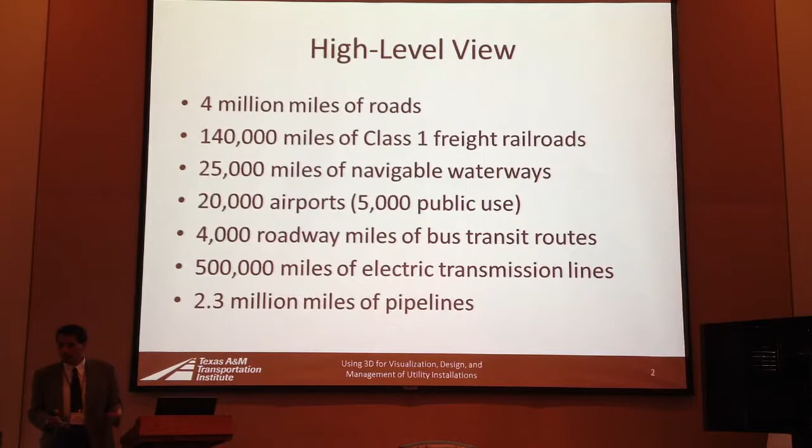Everybody knows there are approximately 4 million miles of roads in the U.S. Perhaps Google knows much better than anybody else how many miles of roads we have. Freight railroads, 140,000; 25,000 miles of navigable water. I didn't know that there were 20,000 airports in the U.S., of which 5,000 are public use, so I looked it up. 500,000 miles of electric transmission lines and 2.3 million miles of pipelines. This is what people normally consider part of the transportation system, the big stuff. But here's a reality check.

Let's look at underground facilities for a second. Tunnels and structure foundations, right? That's one. ITS and other agency-owned infrastructure. 1 million miles of water pipes, 600,000 miles of sanitary sewer. And look at this one: 19 million miles of fiber optic cable added each year. I didn't believe it when I first read it, but I looked it up, and yes, it's between 5 and 10, 15 million miles. Now, not all of that goes underground, but it's a significant amount. Jim is going to mention another statistic: 35 million miles of utilities, right?

Underground, that we know about. Exactly. But notice that if this number is true, and I still don't know if it is true, you probably need to revise that number every year, right? Well, and with fracking operations, we're getting an additional 50,000 miles of underground pipeline just in Pennsylvania alone. Right. So each year. And of course, all the electric and telephone distribution lines, and I figure that those must be included in the 35 million number that we have.

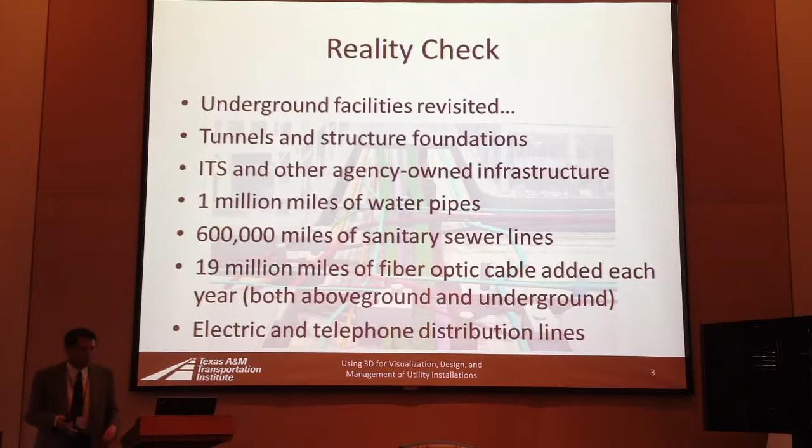Now, I will be very brief on the next couple of slides because Jim is going to mention big data. These keywords come from a definition that IBM has put together, talking about volume, variety, veracity. Volume, I just mentioned those big numbers. Variety: for underground installations, particularly utilities, we have a wide range of spatial data models and databases. That's a reality we have to deal with. Also, not just spatial data, but also non-spatial data. But most assets are depicted using 1D, in many cases linear referencing, or 2D, but very little is done in a 3D environment.

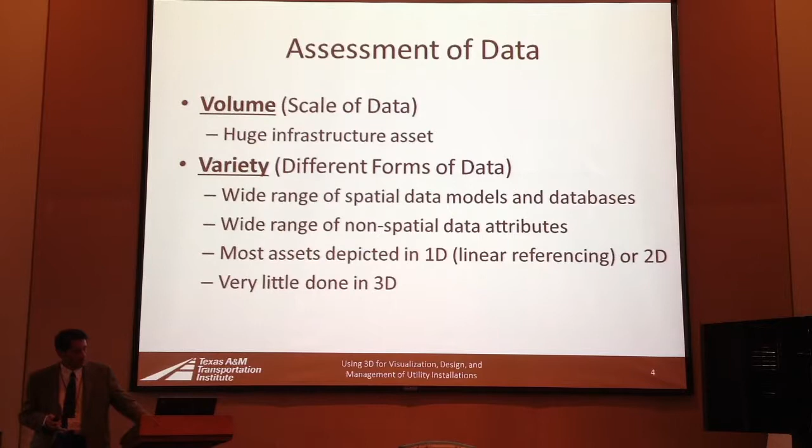In terms of velocity, we are increasingly using all these great technologies, Google Maps, Google Earth, LIDAR, and all that. But remember, garbage in, garbage out is the issue of veracity, which also has to do with big data. One of the key issues in the case of utilities is what are the impacts of not having accurate information. And remember the top 3 reasons for project delays and cost overruns? Utilities are mentioned there because of that. Okay.

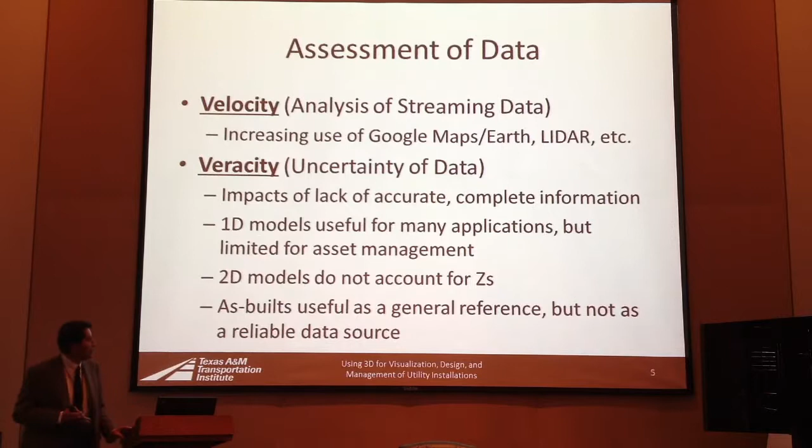Of course, 1D models are useful for many applications, but not necessarily for asset management. And in most projects, the 2D models that we normally use for utilities don't account for Zs. As-builts are useful as a general reference, but not as a reliable data source. So, if we're going to transition to big data for utility installations, there are a number of things we need to do as a community. Develop spatial data standards, and I think Jim mentioned that this morning briefly. He mentioned the ASCE standard. Developing standards for non-spatial data as well.

But at the end of the day, what we need to do is make sure that we have good records after projects are built, and how do we do that, right? A lot of people argue that the best way to capture information about utilities is when the trench is still open, when the utilities are being installed. That's the best time to capture that information. So there is a big need for 3D utility information. I think I'm making that case.

I mentioned the survey; one of several surveys, this one in 2002, highlighted that utility location was the most frequent reason for delays. Spring forward a few years, there was a joint committee that provided recommendations to FHWA on ways to accelerate highway construction. There was a letter, coming from the construction industry. Contractors were telling FHWA that one of the sources of inefficiency was utilities that had not been relocated, or were relocated and they didn't know where they were, etc. And so they highlighted a number of things that had to happen.

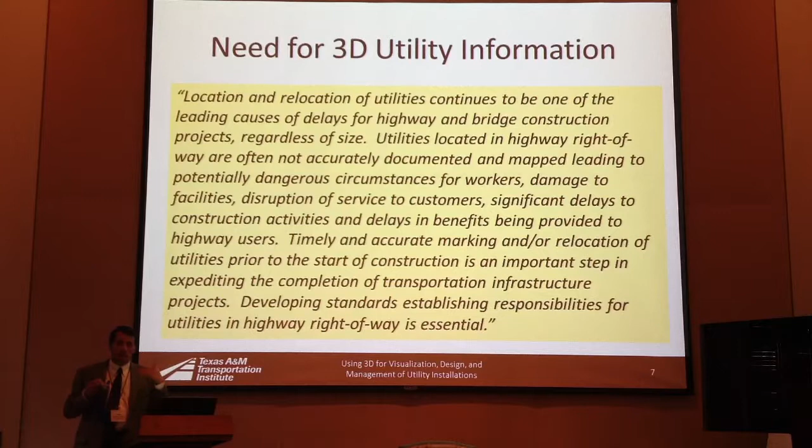They said timely and accurate marking and/or relocation of utilities prior to the start of construction is an important step. They also mentioned developing standards. So those are key requirements that the construction industry has identified. There's been some research in recent years; I'll mention a couple. From the SHRP2 program, we have R01A, which was supposed to develop a 3D framework for the inventory and management of utilities. Also B and C, which have to do with the identification and location of deep utilities and other methodologies. I'm not going to touch on that.

There was another series, the R15 series B and C, which developed a utility conflict matrix approach and process to manage utilities. 15C is active; we are actually working on it, conducting trial implementation. There's also been some research at the state level. Texas completed a couple of research and implementation projects. Florida DOT also completed one on the feasibility of using CAD information to develop GIS-based inventories of utilities, but nothing on 3D.

The last bullet is really the subject of my presentation, a project funded by FHWA looking at the feasibility of 3D mapping and marking of underground utilities. So what was the purpose of this project? In looking at the SHRP2 R01A project, there were several issues with the research. I'm not going to get into that. They put together this scope of work that basically asked for an answer to the following questions.

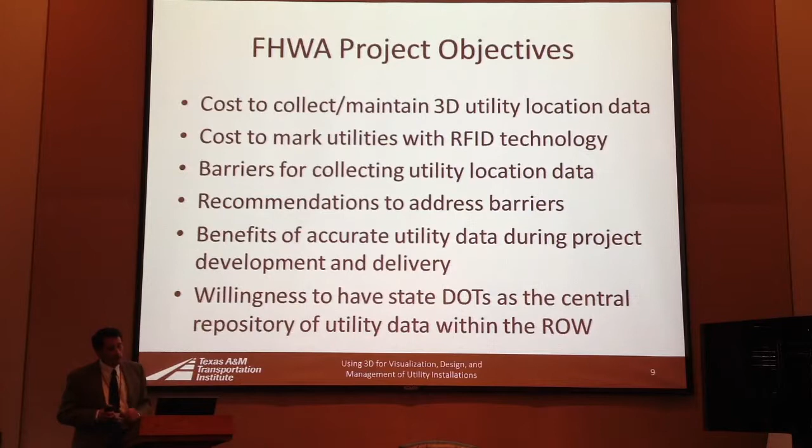And finally, this one, which is a tough one to answer, is willingness to have state DOTs as the central repository of utility information for the right of way. So there are some examples. This one is from Seattle. As I recall, Jim, correct me here if I'm wrong. This was really for visualization purposes, right? Correct. This was really not the result of a 3D investigation, or maybe 2D.

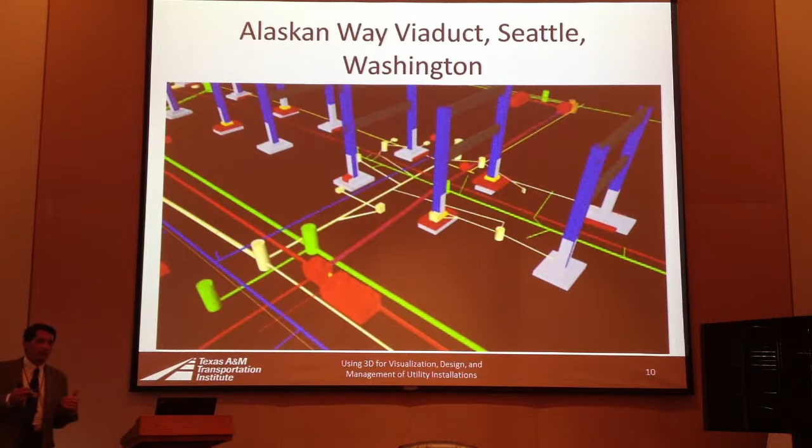Well, we did 2D investigation very thoroughly, and a few thousand spot locations for the Z data, but everything in between those spot locations was a best guess. Okay, and this is the result of that. So remember, garbage in, garbage out. Unless you characterize the uncertainty associated with those utilities, that's something to do with visualization. This is a pretty picture, but there is data behind it. And if you use this product as part of the workflow for design, you have to understand those uncertainties.

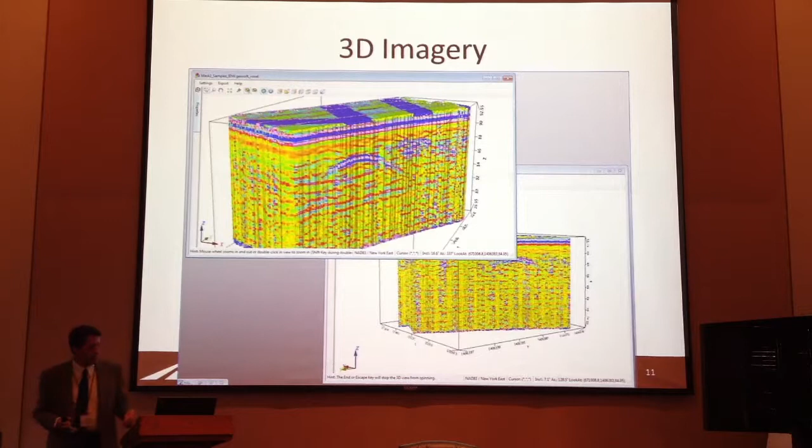This is the result of a tool, which is GPR in this case, using a GPR array that enables the characterization, actually the identification of certain spots where there might be utilities. Let me put it this way. It requires a lot of interpretation. You see some of these elements right here, which kind of point to the probability of utility installations that might be there. It requires a lot of interpretation.

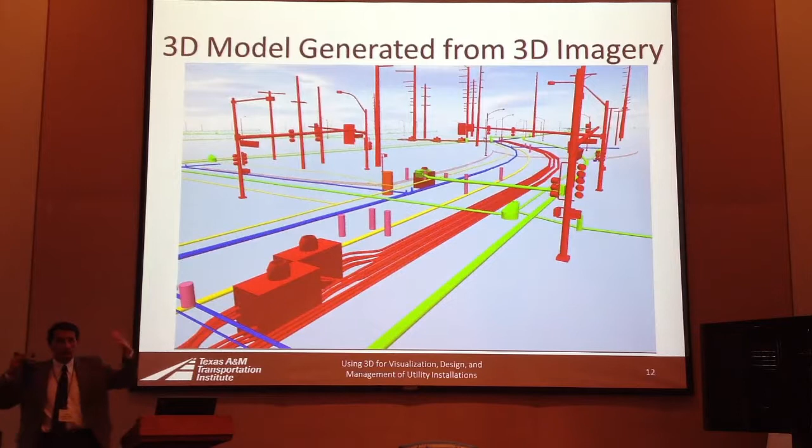And then this is the next phase. You conduct a very serious, thorough utility investigation using a variety of tools, and depending on the workflow, then you develop these 3D tools. In this case, it's not just visualization. This one was really the result of converting all that set of data points, and the result is this. Here's another one. This is in Ireland, by the way.

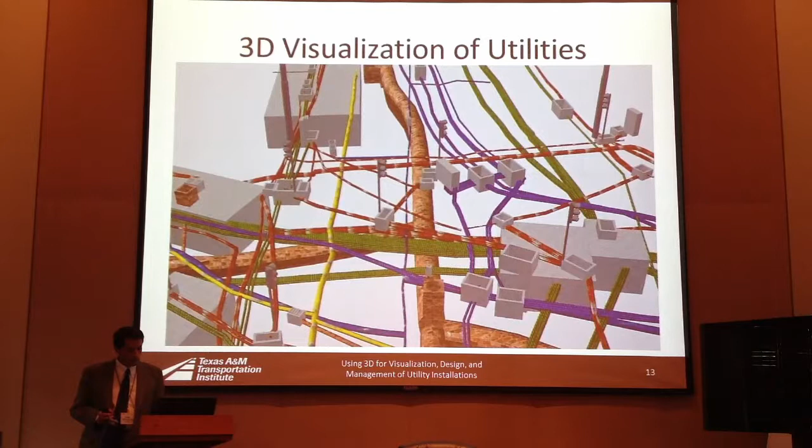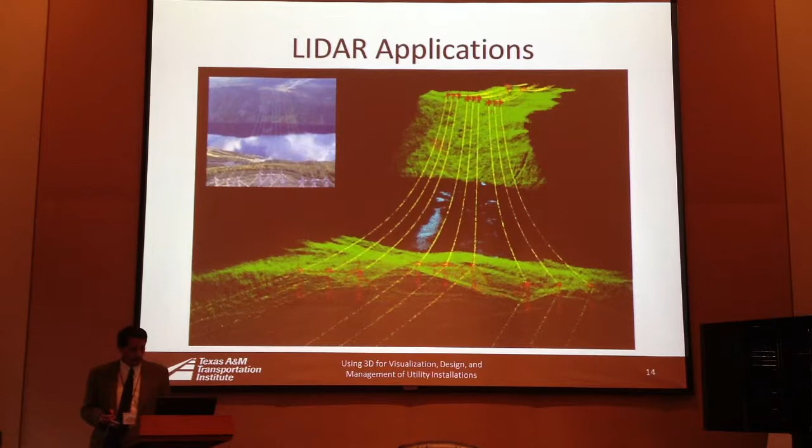LIDAR, I shouldn't forget this. Of course, you can't use LIDAR for underground, but there have been some applications trying to use this to characterize above ground installations. So, in terms of what we need to do for this project, we are halfway through it. We submitted a first report almost a year ago, and we are actually right now working on task C. And I will talk about that in a second. It basically involves talking to a number of state DOTs to gather information about what they're doing.

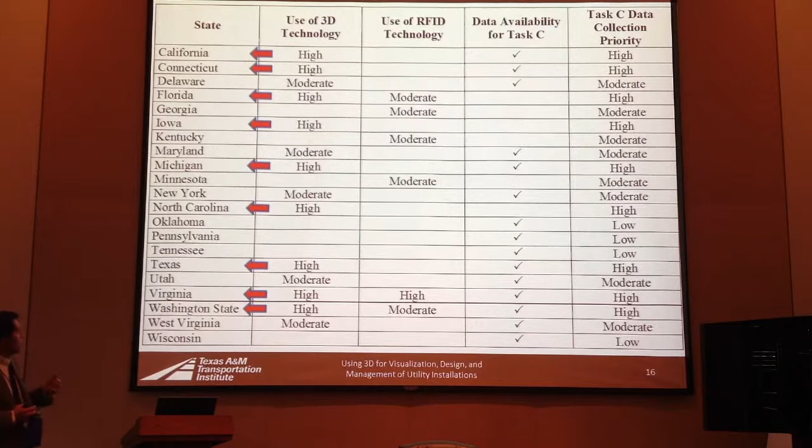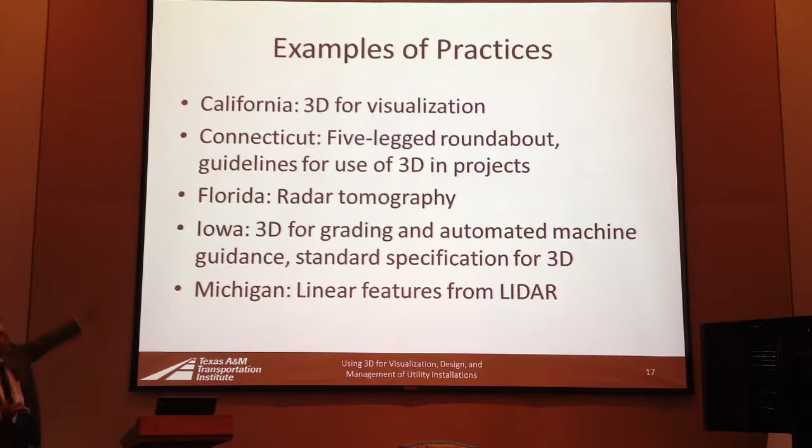Last year we surveyed all 50 states, and most of them responded. And the ones that you see marked with an arrow provided answers that, in our opinion, were interesting. For example, in the case of California, we learned that they were using 3D for visualization mainly, but nothing utility. You rarely see anything related to utility, but we're trying to capture practices from what we call traditional 3D, if we can say that. But the idea was to try to learn some lessons from that, and then try to project it to the case of building 3D models for utilities.

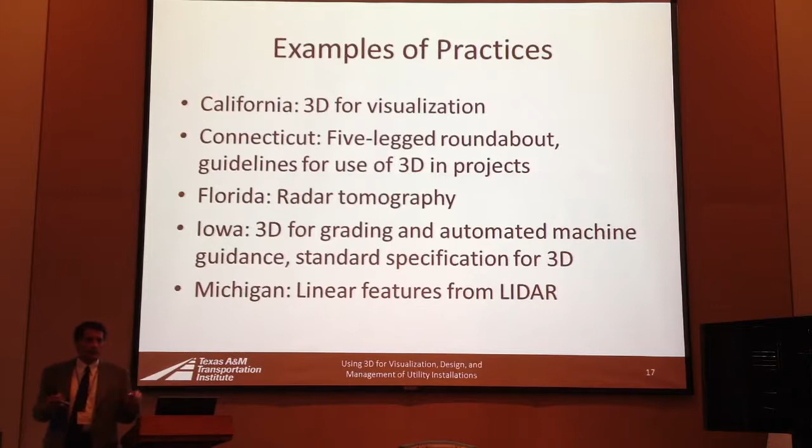In the case of Connecticut, we learned they have developed guidelines for the use of 3D in projects. In Florida, there is an active project right now dealing with the use of radar tomography, and I'll touch base on that for a second. In Iowa, everybody was talking about Iowa and the fact that they were at the forefront of using 3D for automated machine guidance. And so we actually traveled to Iowa to learn what the practice was about and learn some lessons from that. In case of Michigan, we learned that they are using LIDAR, and more importantly, they are extracting linear features from the LIDAR product.

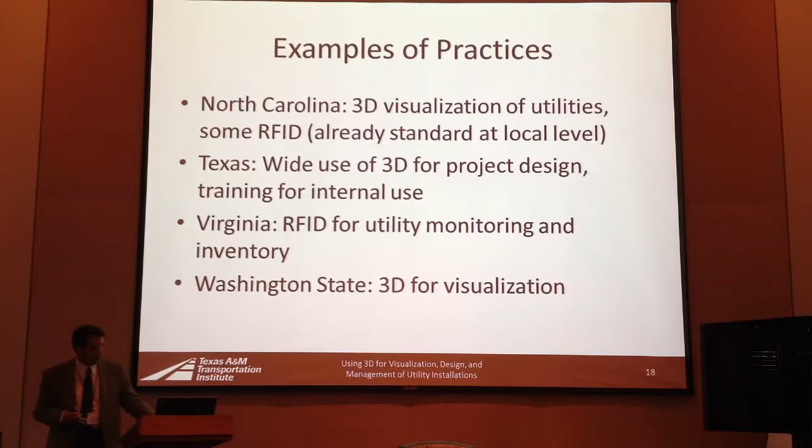In the case of North Carolina, they're beginning to use 3D a little bit to visualize utilities, but mainly for public outreach applications, not design. Some RFID already standard at the local level. We know from Texas, wide use of 3D for project design. We still need to interview them to actually learn the extent to which they're using it. And then in Virginia is the use of RFID for utility monitoring and inventory, and I'll touch base on that as well. In Washington State, there's also 3D for visualization. You already saw the examples here.

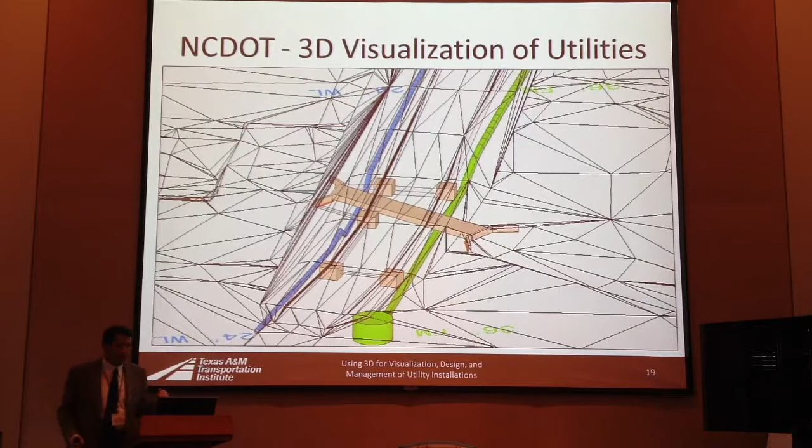North Carolina, this is an application that they shared with us. Of course, traditional 3D characterization of the project. You notice here a drainage structure, and then here the facilities, the utilities. In this case, what they did was to take the plan view and cross-section and profile information to develop this 3D characterization of the utility information. That's all they used it for. And that seems to be kind of the typical application.

automated machine guidance. And so in the mid-2000s, Iowa said, okay, what can we do to help you, the contractors, develop a better workflow? And this is what the contractors say. You know, this is what I would like to get from the Iowa DOT, is something that would enable us to develop a 3D model faster. And they decided, okay, yeah, we can do it. And so Iowa basically has switched its own workflow, and they do 3D design from scratch, from the very beginning.

In our conversations with them last month, we also learned that they have begun to use 3D for preliminary engineering design, which is fantastic. So they are moving in this direction. We also asked the question, how much does it cost to develop 3D models? And guess what? Their answer was, we don't know. The reason is very simple, because 3D is now an integral part of their workflow, and so for them it's really not an issue, right? And that was an interesting observation.

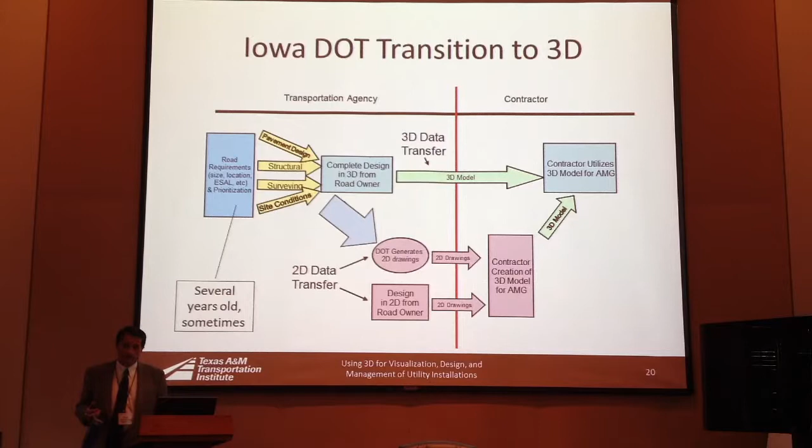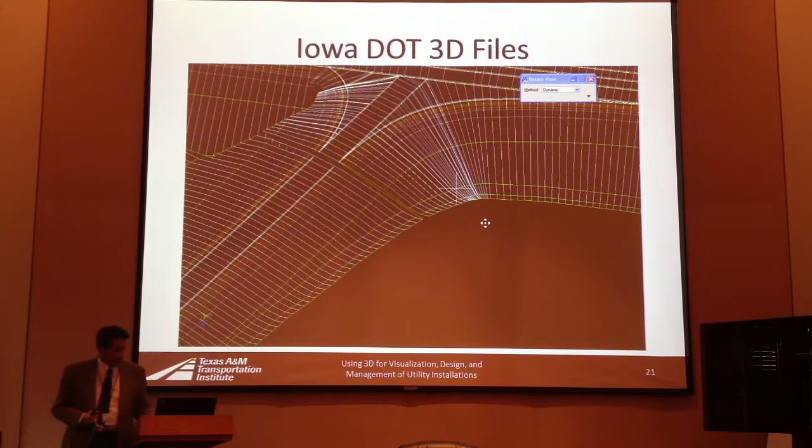One of the things we learned from Iowa was that even though they are designing in 3D, not everything is designed in 3D. And so this is the current state of the practice in Iowa. And if you notice, this is, of course, the characterization in 3D of the project, except that on occasion we saw these gaps right here, and we were wondering, what is that? Well, it turns out that those are spaces for drainage structures, but they don't design in 3D yet.

And one of the reasons is that their drainage design is still handled by a different division, and that design is still done the traditional way, plan view, cross-section, profiles, and so on. And the drainage division only develops 3D models if there is a need for it. So in the mid-2000s, the contractors said, we would like to get 3D models, but we don't care about the drainage structures. They are local features. Let's try to maximize the benefit, and let's maximize the product to diminish cost.

And how did they do that? Well, by getting 3D information throughout, except for those local conditions. But when they do have to do that, for example, for public outreach, then they convert that information into 3D, but it's not for design.

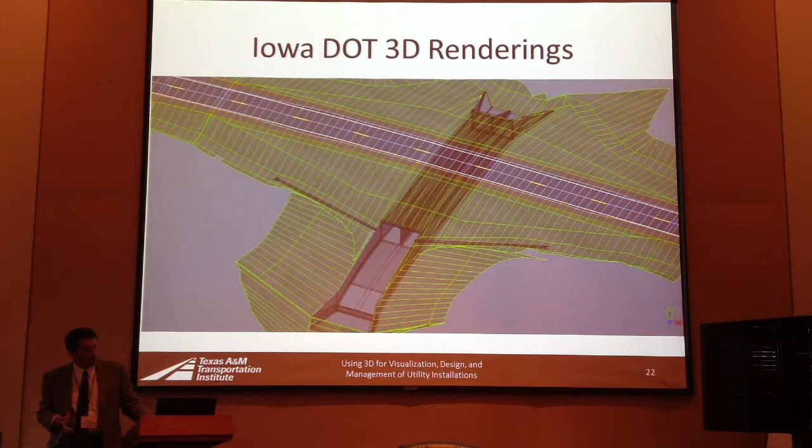We asked the question, how about utilities? And they don't design 3D for utilities yet. Now, one of the reasons, I'm guessing, and they seem to confirm that, was that most of their projects are rural. I'm guessing that as the number of projects in urban areas increases, there is a chance that they will increase the use of 3D tools for design, etc. Okay, so that was Iowa.

Let me switch gears to Florida, the radar tomography project. And in this case, Cardno TBE, which is the contractor who's doing the work, had a subcontractor, and this is one of the passes using GPR.

I believe this is at about, how deep is this? 6 feet maybe? No, 10 feet. Maybe a couple feet. I think it's a couple feet down. I think 4 or 5 feet was about the max. Yeah, wouldn't this be the depth, the layer? Yeah, a couple feet. That particular layer. I think that's probably what it is.

Right. And so you can see these red lines that suggest the location of underground utilities. The original objective of this project, as I understand it, was to try to identify the feasibility of using radar as the main tool to characterize underground utilities.

What they learned in the process was that GPR is a great tool, but only one of many tools. And I think that's perhaps the best way to characterize it. Yeah, especially in Florida, which has great sandy soil, where you will get the best radar image of anywhere in the country. It was still only effective; less than 40% of the existing utilities could be imaged by radar. So when you go to other places where the soils aren't as conducive, you're gonna get results that are even less than that. It's not the panacea that we would like it to be yet.

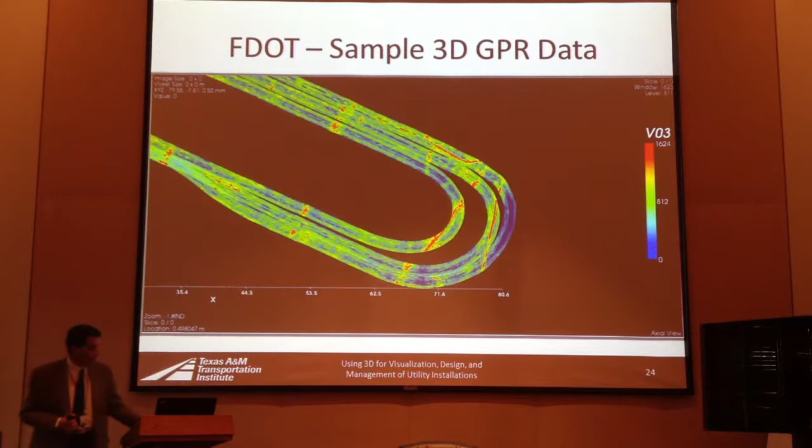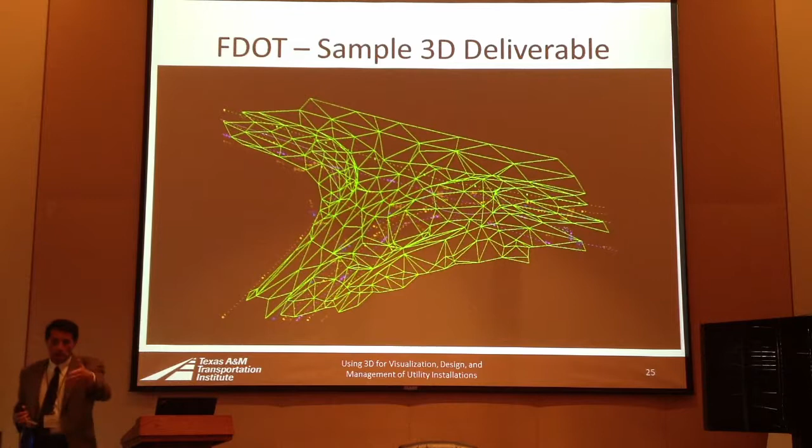But it is a great tool, and I think that an important lesson is that, just like any designer, you're not gonna use just one tool to design your project. You use whatever tools are needed, and this is one of them. The end result is something like this, and there are some views where you can move things around, but this is really the characterization of the underground installations. And then the output of this was transmitted to the DOT, which in turn gave it to the designers. So that's what it is.

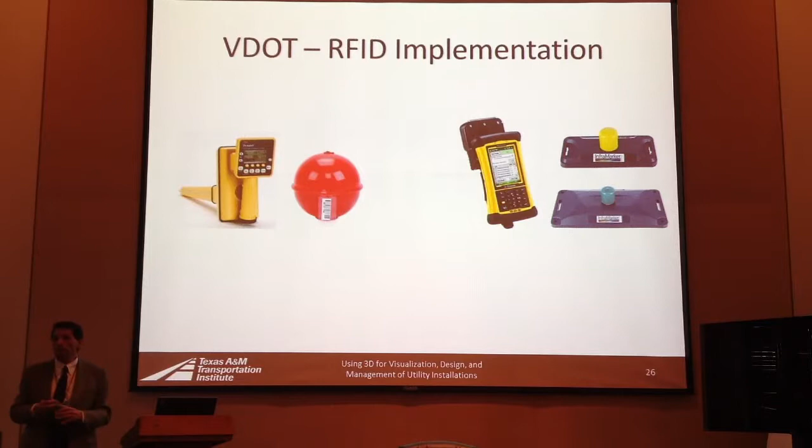So, Virginia. In Virginia, there was a very different application which involves the use of these ball markers. There is an RFID chip inside. They are probably about 4 or 5 inches in diameter, and the idea is that they are dropped when the trench is still active. And this is the main model they're using. Now, that's not the only model in the market. You also have this other model right here, and there are a few other applications in Europe which are slightly different.

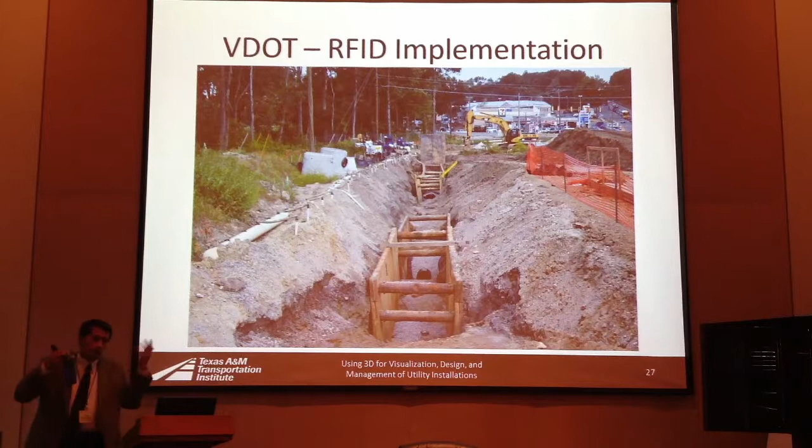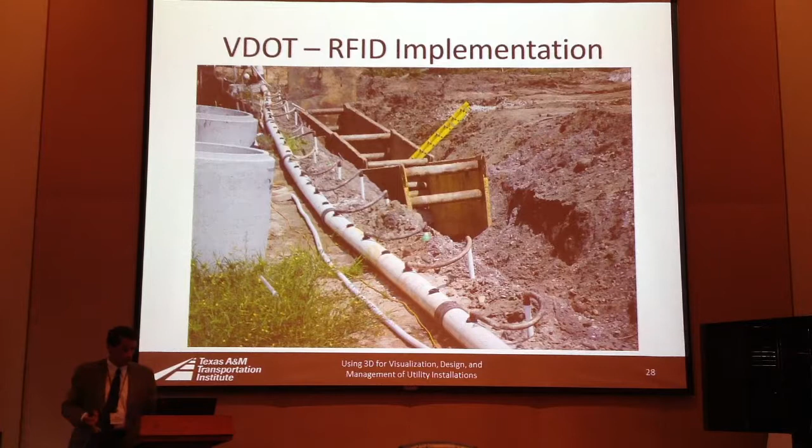And this is very much the way it works. So when the trench is still open, you deploy these. You see some green dots right here that are ready to be dropped into the trench at about maybe 4 or 5 feet. And because they are RFID, you can program them. Each RFID has an ID, and then you tie that to a relational database or some sort of database to keep that information. So here is another view, and you can see the location of these at regular intervals. I think it's 25 feet. Here's another view. And this is one of the end results.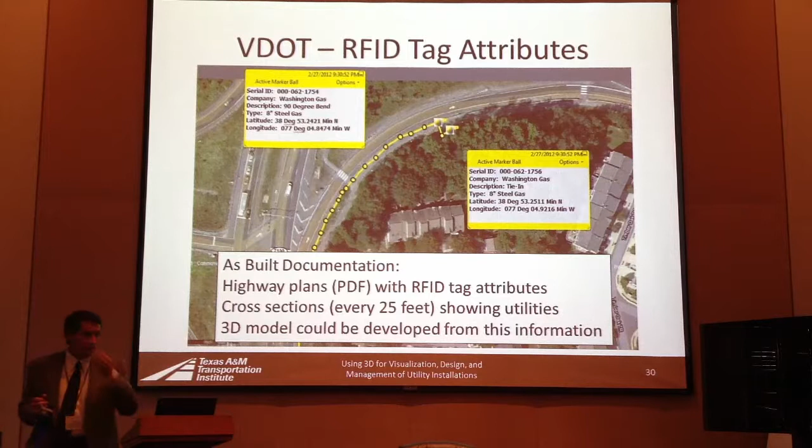They also have as-builts. In Virginia, like many state DOTs, the as-builts, the official product, the official record now, is a PDF. So the PDFs include locations associated with the RFIDs, and they are clickable. So in the PDF, you click on the RFID, and this is the information you get. So the PDF file is very similar to this product right here, except that it is in PDF format. But then they can disseminate it to authorized users, like utility companies or whomever.

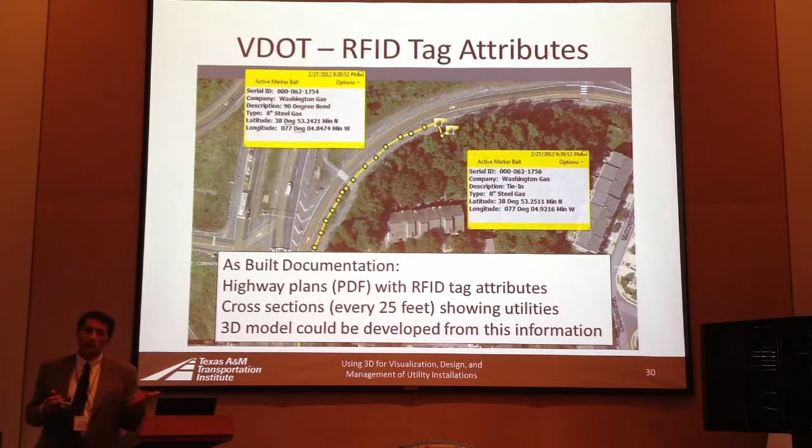They also keep information about these installations on cross sections every 25 feet. And so you can imagine they have information both in plan view and on cross sections. And the way they set it up, they don't have information about utilities in 3D. This is their version of 3D, and you could actually build a 3D model from this kind of information. And this is interesting.